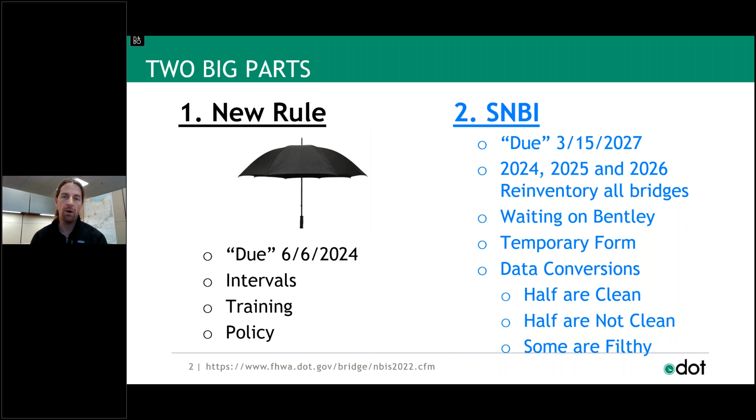So keep in mind there are two parts, the new rule and the new manual from Federal Highway. The outline of my talk is this: I'm going to talk about the qualifications, talk about the intervals, and this is all new in the SNBI and new in the rule. Then we'll get into the SNBI. The biggest part I'm going to talk about is the data conversion, that third bullet.

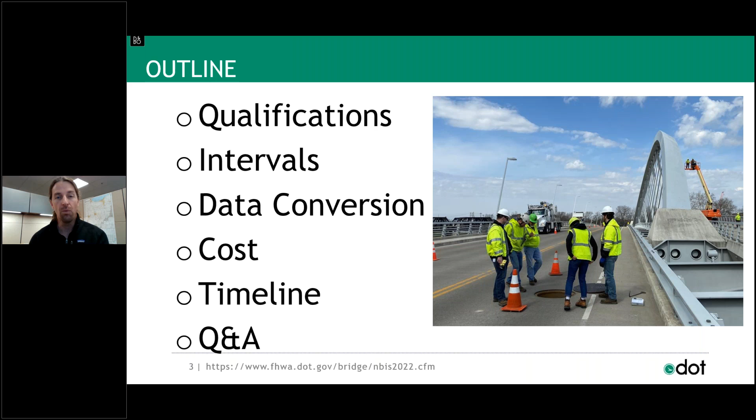I'm going to throw out some numbers, it's kind of a guess to be honest, but I'll give you some numbers, something to work with, an overview timeline, and then I have about 20 questions because we've been doing this kind of sharing the past few months. I'll share some questions people have already asked, and give you the answer. This whole presentation, as Paula said, is available for download in the handout section. Also available in the handout section is the SNBI, so if you want to start reading through that, the document is available in the handouts.

First bullet here is qualifications. It's largely staying the same. To be an NBIS program manager, you have to have an Ohio PE, you have to have the comprehensive class, and you have to have periodic refresher training. That really didn't change, but some of the finer points, Federal Highway's really gotten into.

And for the comprehensive class, there's no more grandfather clause. The last time the NBIS changed in 2005, we grandfathered a lot of you old timers who were doing program manager duties before 2005. There's no grandfather clause now. So those of you still hanging around who still need to be program manager after June 6, 2024, and were relying on that legacy or grandfather clause, you have to take a comprehensive class.

You have to take a Level 1 and Level 2, which we are still teaching, offered three times a year. Or, if you're a PE, you can take the one-week NHI bridge inspection comprehensive class for PEs. Refresher training, there's a lot of questions about refresher training, and I'll get into that later.

Team leaders, if you're a team leader, is someone that's doing the inspection, that leads the inspection either by themselves or in a team. There's 4 ways to be a team leader. I'll show you that in a bit. But notice that you still have to do a comprehensive class and still have to have periodic refresher training.

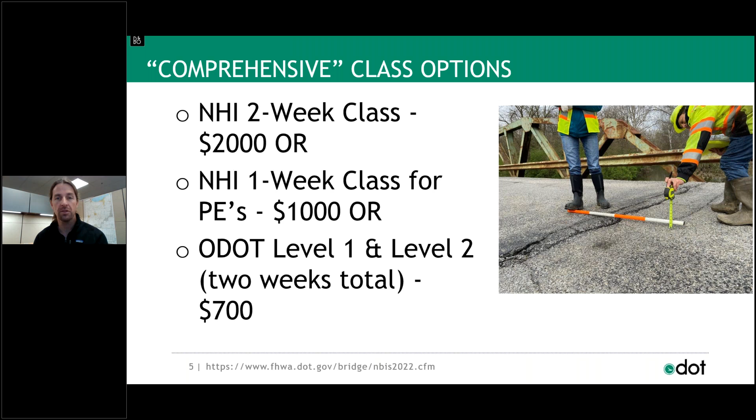NHI, National Highway Institute, you can take the class anywhere in the country that it's offered. We are trying to offer as many of those classes as we can. LTAP's been great to work with, drawing in a lot of those classes.

If we look at the numbers, this is from August, so some of you have taken classes now, but consultants, there's about 20 of you. These are like the old timers that got grandfathered in. You need to come back and take a class. It might be beneath you, it might not. You might learn something, but we're not saying you're not competent. We're saying you just don't have this checkbox to meet the national standards.

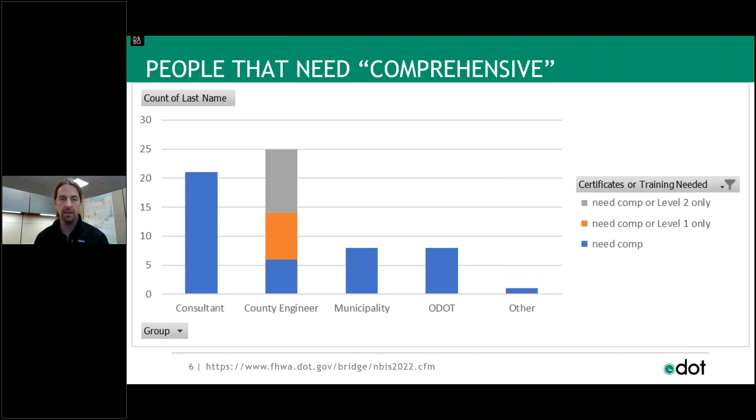So consultants, that first bar on the left, there's about 20 of you. County engineers, there's about 25 of you. Municipalities, there's 7 or 8. ODOT, there's 7 or 8, and then there's some others. There's not a huge number of people that need to take the class, but it does exist. And you've got a grace period now, about 1.5 years to comply.

The NSTM, the fracture critical class, the non-redundant steel tension member training, that's a $900, 3.5-day class. Jared Bax in our office is working on teaching this class, so we're kind of working through some of the details there. We don't have all the details, nor do we have the materials yet.

But we're considering offering this class from our office. The refresher training before, in the NBIS, it just said you got to take periodic refresher training, and states decide what that periodic refresher training is. In Ohio, we said you got to take one class once every 5 years, and here's the classes that count. That authority has been taken away from us, so to speak. Federal Highway now says they have to approve the class, so they provide the list of classes or trainings that comply.

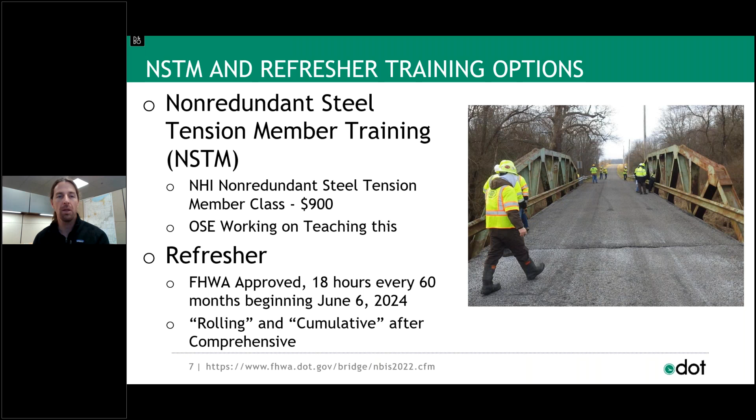And it has to be a cumulative 18 hours every 60 months. You have to have that refresher training ready to go June 6, 2024. So it's 18 hours every 60 months, Federal Highway approved. If you keep asking me, is this class approved, is this class approved, I don't know. Federal Highway is holding the keys and they are not answering. I don't know what their plan is or what classes comply. So ask Federal Highway, because that is something they want the authority to decide.

If we look at some of our classes that are currently scheduled, we have a lot of the 1 week NHI for PE classes coming up. Next week, we have one in Columbus. We have another one in Columbus in January, another one in Columbus in February. In Lebanon, District 8, we have one in March. In Akron, District 4, we have one in April.

So we have a lot of the NHI 1 week for PEs. Please fill these classes up. The ODOT Level 1, Level 2, we're going to commit to - we've got a Level 2 next week, and we're going to commit to 2 of these every year. You have to register through LTAP, and Jared is leading the charge on those.

NHI Fracture Critical - again, there's none scheduled because they're retooling the class. We hope to offer those as many as possible next year and in 2024, and we are again looking into teaching these. The refresher training, which most of you have questions about, that is an unsolved mystery. I'm going to submit that for the Netflix unsolved mysteries. I don't know anything about refreshers, so it's to be determined by Federal Highway.

Federal Highway does have a resources page and a frequently asked questions section, but they haven't put any questions in there yet. So that was the training. Many of you have some classes to take before June 6, 2024. Now let's transition into the intervals - when I say intervals, I mean how often do you inspect the bridge.

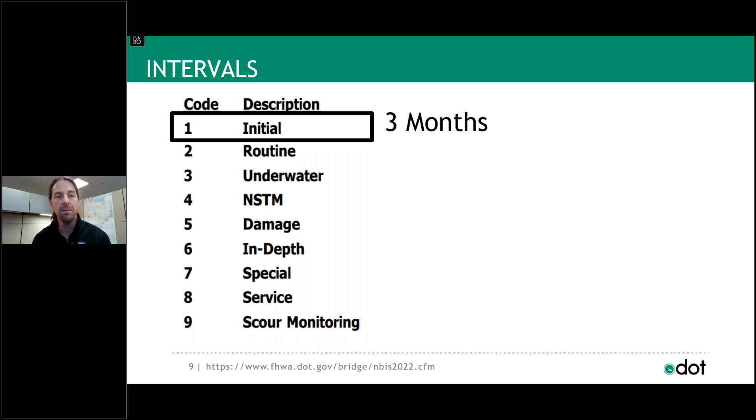Most of what we do is a routine inspection. The initial inspection - this is all new in the regulations - you have to have that initial inspection locked down and done within 3 months of the bridge being built or 3 months of the bridge being rehabbed. That includes part width construction. Anytime you put public live traffic on a new structure - new deck, new super, new sub - you've got to have a team leader inspect the bridge and make sure it's safe. Ideally, the day before it's open would be ideal, but we're given a 3-month grace period. So that is in the law now.

Routine, we're not going to change or deviate from our RBI - it's still going to be 12 or 24 months. If you want more information on RBI, we have that policy that came out last year, and that is something we're living in right now. Underwater, it's been 60 months forever and a day since the underwater requirement came about. There are dive bridges that now will require a 24-month dive. So that is a big update.

And the NSTM, which are the fracture critical bridges - there are fracture critical bridges now that must be, by national regulation, receive a fracture critical inspection every 12 months. You might guess what's going to be the requirement for reducing the dive and reducing the fracture critical interval - it's condition, and I'll show you what that looks like.

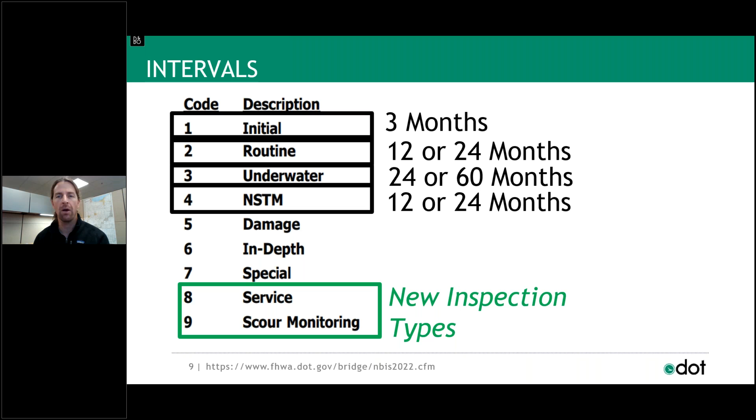We have a couple of new inspection types. The service inspection, which would be you're stopping at the railroad bridge overhead and doing a service inspection - it's kind of a less-than-routine inspection of somebody else's bridge when they're fully responsible. And scour monitoring is a new inspection type - we're kind of working out the details on the scour monitoring one. All of this starts June 6, 2024. Now I have the same question.

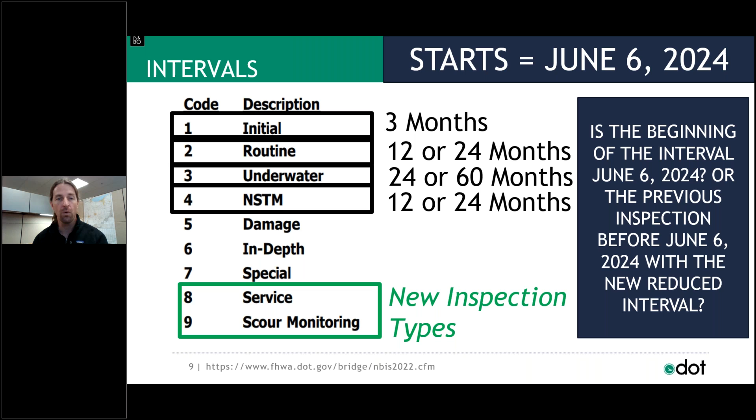Is the beginning of the interval June 6, 2024, or the previous inspection before June 6, 2024 with a new reduced interval? I haven't got that answer. I would assume we're in our grace period now, so start inspecting these bridges in 2023, 2024 to get onto that interval if it's reduced to 24 or reduced to 12 for your dive and fracture critical.

We're not going to do an extension of our fracture criticals, but if you have a super sub and it's a fracture critical bridge, super sub that is 4 or less on the 9 scale condition-wise, then you have to do a 12-month inspection. So every 12 months you're climbing the members, getting a snooper, getting a bucket truck, getting into that advanced access, getting hands on.

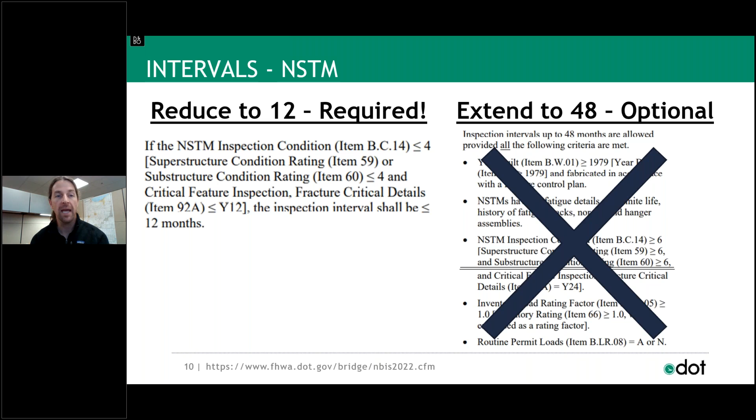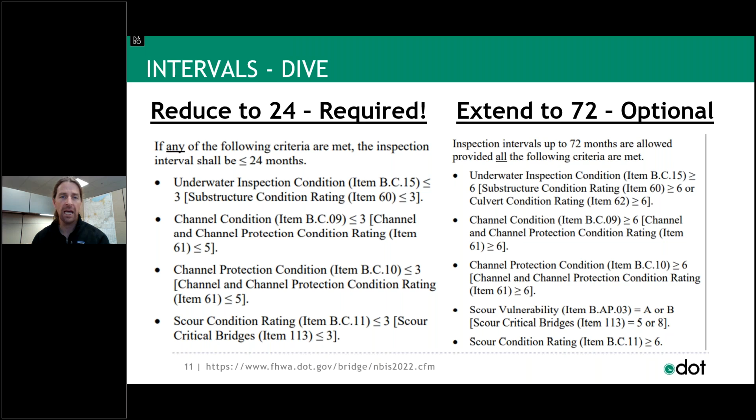That is a requirement. For dive, there's a reduced to 24 and it's based off condition. Sub, channel protection or scour condition 3 or less is a reduced to 24. And there's an extended interval, so you can go beyond 60 months if your conditions are 6 and above and your scour vulnerability code says the structure is stable.

So if we look at the number of bridges on the local agency, we have counties with 94 dive bridges, 78 of them can be extended based off of your current data. Cities have 17 dive bridges, 10 of them can be extended. So there's some good savings here in extending should you want, or you can just stay to 60 and do your 24s.

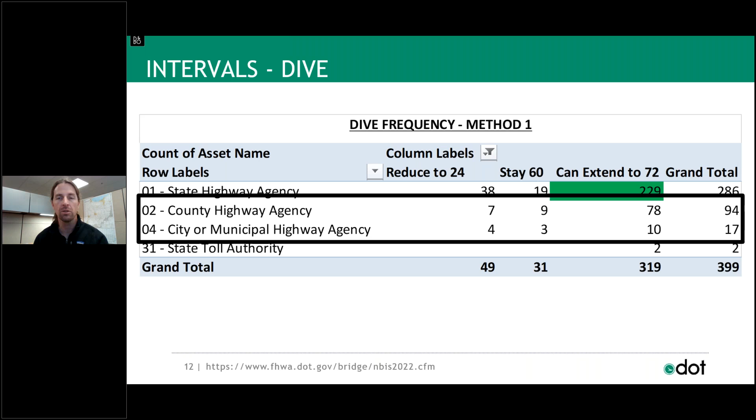Looking at the other intervals for the initial routine, this is any new, replaced, rehabbed, or temporary shoring, you've got to get in there within 3 months. And for your initial, if it's a fracture critical bridge or a dive bridge, you have to do that first fracture critical or that first dive within 12 months after opening to traffic.

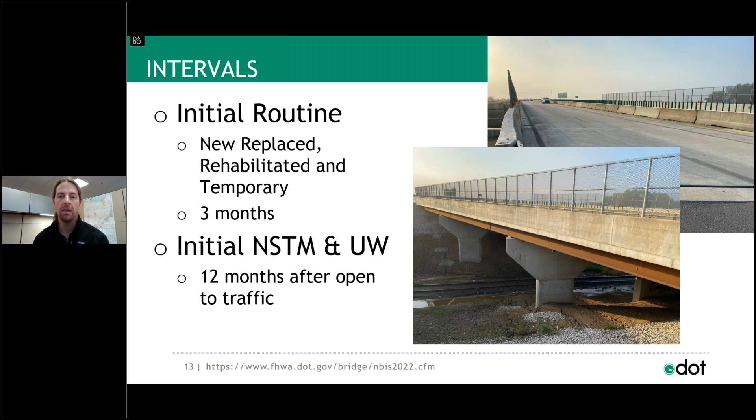So the initial routine is within 3 months. The initial fracture critical and dive is within 12 months. That was added to allow for those of you that need to contract out more complex inspections. There's a little bit of a grace there, but that is in the regulation and that starts June 6, 2024. So this is kind of like the last slide when I'm talking about the regulation.

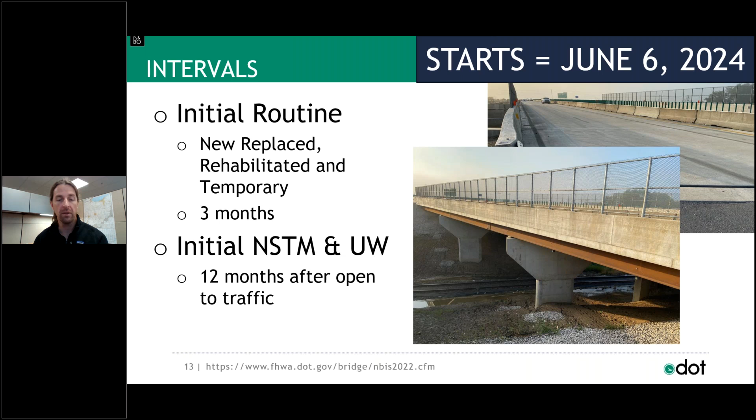The rest of my slides, the bulk of the talk here, is going to be the data conversion, the new SNBI. So we're going from the left-hand side, the recording and coding guide that came out in 1995. Believe it or not, when we submit the federal tape, we still have to convert all of our values to metric units because that was the window in 1995.

Think about all the database structures that were available to us in 1995. We far surpassed a lot of the antiquated ways in submitting. So moving off of the 1995 version makes a lot of sense to me. There are some challenges, but nonetheless, we're going from recording coding guide to the SNBI, which is on the right-hand side.

We're also going to add in the elements, the specifications for the National Bridge Inventory elements into the SNBI. Those were added to the SNBI. Those are not required for local agency structures off the NHS. So those were not added in as a requirement. They're just added into the SNBI so they don't have to carry multiple manuals. Those are in the SNBI.

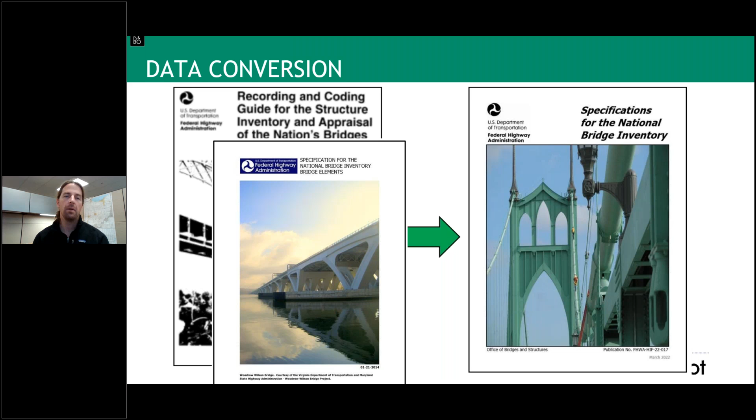We got the question, what about SNBI training? Well, this might be the first time you're hearing about this, or the second time. Since August till now, I've been on a speaking tour, meetings, webinars, and Teams meetings and the like. This is one of the stops in the speaking tour. There are lots of resources on the Federal Highway website that you're welcome to browse. Also, I have the 2 resources in the handouts to this meeting.

In December, we're going to start focused monthly webinars, December 13th, and you'll see this invite come through LTAP. There's a webinar much like this one where myself and Omar in our office will talk about how we're going to handle one of the dirty transitions, the rail standards fields. That's a nasty one. So we'll talk about how to do that.

January 25th is a webinar on component condition ratings. What are some of the changes we're seeing with those? And Valentine's Day, you can come celebrate Valentine's Day with a webinar on scour vulnerability. You can listen to my voice and hear us talk about how we're going to handle complying with that code.

We've been promised a comprehensive SNBI training from Federal Highway, and I'm pretty sure they're going to schedule this any week now. They promised early 2023 a comprehensive SNBI training. We have not opted for a comprehensive training because it's such an unwieldy, 2-3 day training.

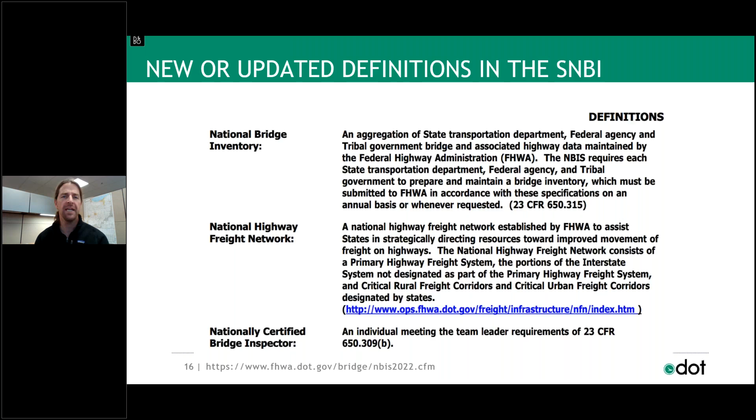If we look a little further, the data looks a little different. Those of you working for the state, we have complex interchanges where we have bridges on bridges on bridges, and multiple features. There's something in the SNBI that's a little sneaky - like filling out the element table or the under records, there's many to one. There's many under records to one bridge. This many-to-one idea filters throughout the whole SNBI.

So we have all of these features, and all of a sudden you have seven different layers where every feature needs to be inventoried. Every feature needs an ADT, every feature needs a clearance, every feature needs something - so every feature is inventoried. It might look like, oh, there's only 60 additional fields, but you've got to multiply that. If a structure has multiple features, you multiply that by the number of features. So it's not a one-to-one.

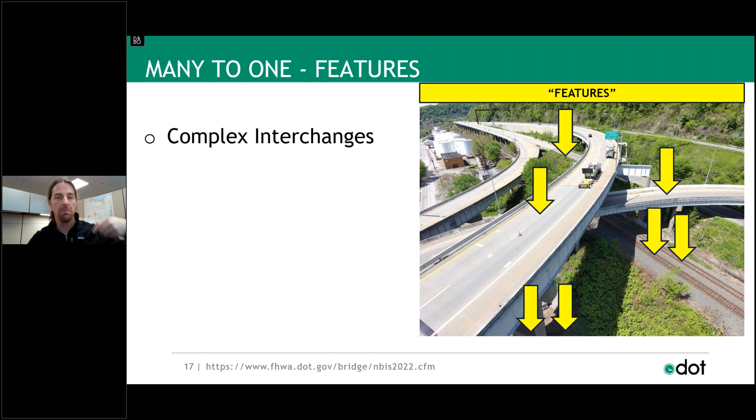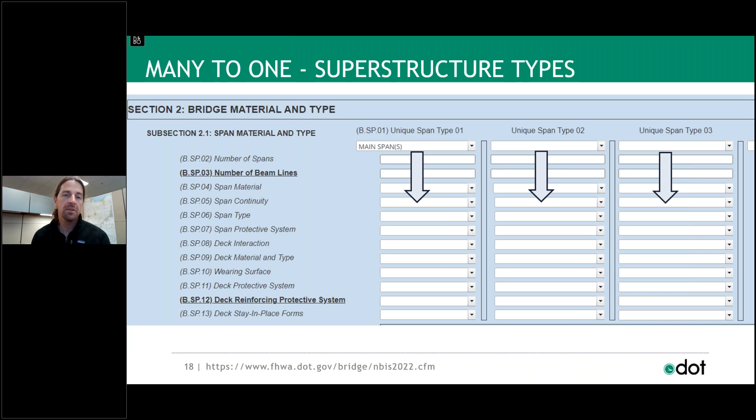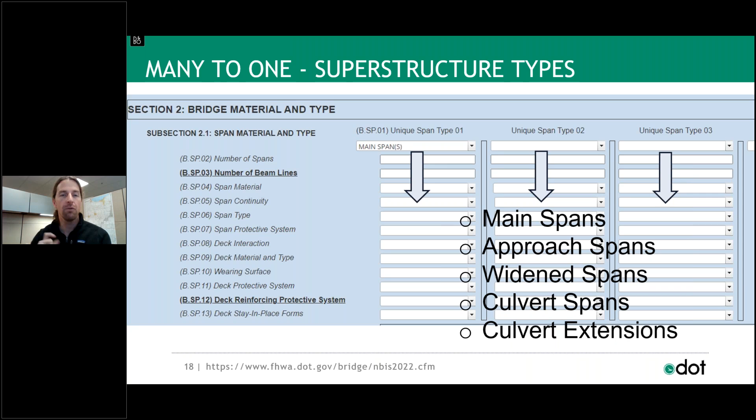If we look at superstructure types, and you have 3 unique superstructure types, each of those unique superstructure types needs to be inventoried. That could be your main span being different from your approach span, or your main span for the interstate has been widened, or you have culvert spans that have been extended - those are all unique superstructure or culvert extensions that need to be inventoried uniquely. So each unique span type gets inventoried.

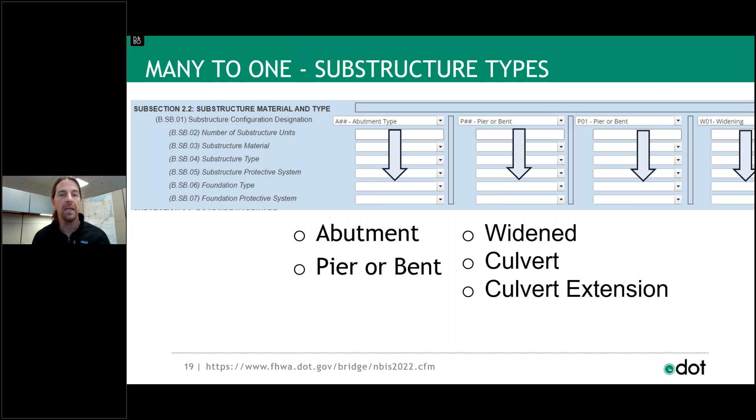Same thing with substructure types - each unique substructure type gets inventoried. So abutments will get inventoried, and then each change in pier type gets inventoried, the widened portions get inventoried, and so on. So this many-to-one really filters through. All that to say, we can't copy and paste data from AssetWise for many-to-one issues. That is something to be aware of.

If we zoom out and look at the data transitions, each bar here represents a number of data fields. On the left-hand side, there's 54 fields that are a clean transition from NBI to SNBI. The next bar, just by luck, we have an exact Ohio field - 17 Ohio fields that are a clean transition to the SNBI. There's clean transition calculated fields, you don't have any work to do there. There's new fields - about 12 that are brand new that you have to fill in. And the highest bar, on the far right, there's 65 that are not clean.

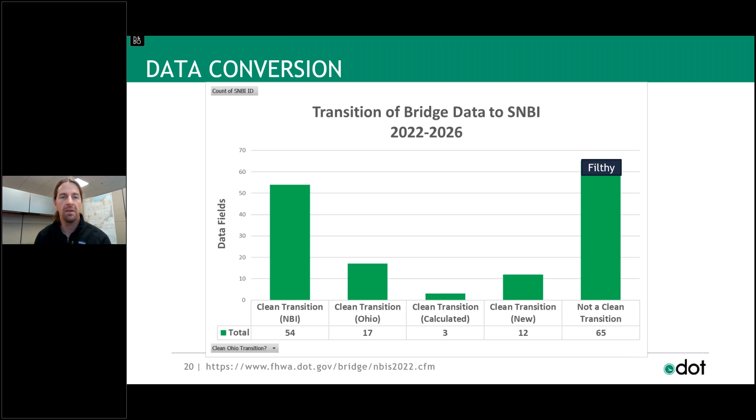You might double or triple that depending on how many features you have or how many trucks you have load rated - so there's an expansion there. If we look at just a small portion of that, there are some filthy, dirty, unclean fields that need a lot of effort. That's what we're saving those webinars for, starting in December - the filthy fields, the ones that might take a little extra understanding, a tweaking of our policy, something clearly mapped out for you. So this is kind of the transition, looking at the data from a zoomed out view - how hard is this going to be?

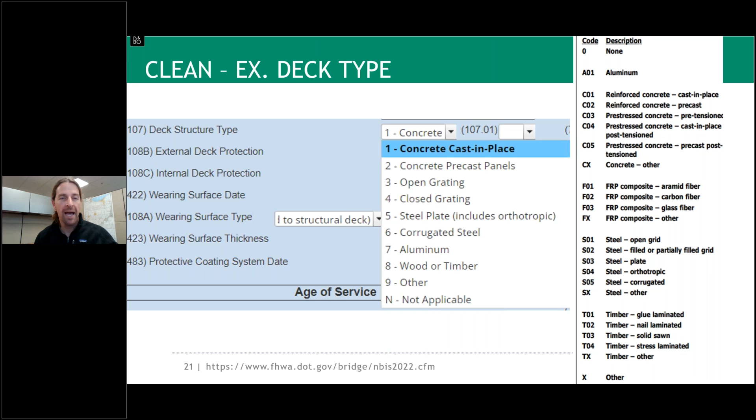If we look at some of the clean ones, the deck type concrete cast in place will go to concrete cast in place, so that's an easy copy paste. If you have a corrugated steel deck, you'll go corrugated steel. If you have a wood or timber deck, you now have to determine is it glue laminated, nail laminated, solid sawn, stress laminated, or others.

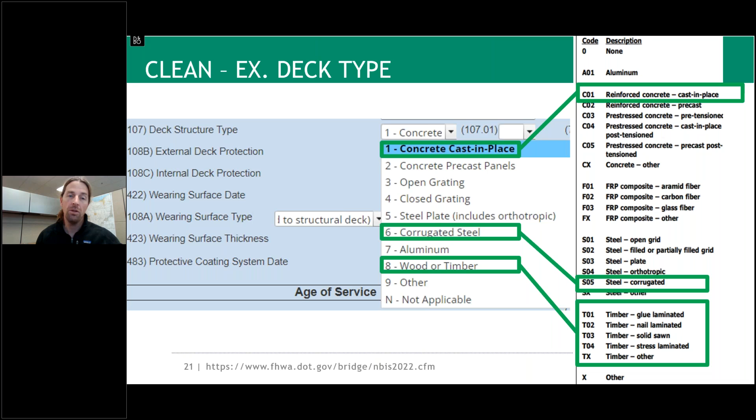So depending on your current deck type, you might have to make a decision: what type of timber deck is this? And for the others, Federal Highway has expanded the others category. Is it FRP, composite, what type of fiber? So it's kind of clean because most of our structures are concrete or corrugated steel, but the timber is not so easy.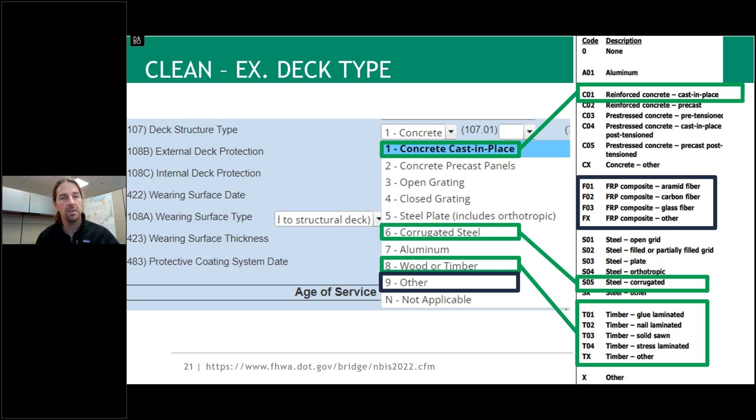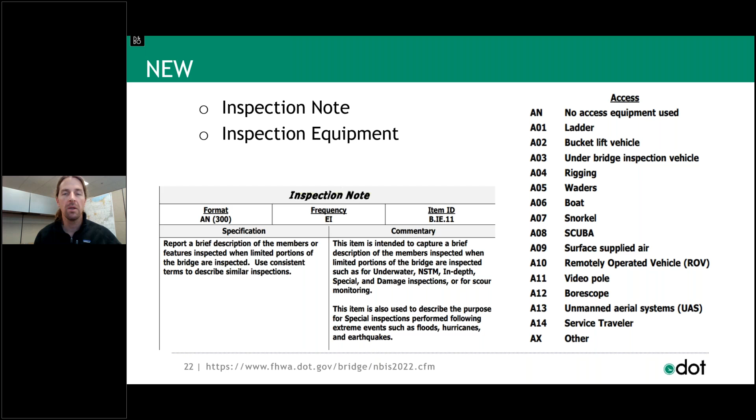So just keep that in mind. There's a new field. Federal Highway now wants some inspection notes in there, and there's guidance in the SNBI on what goes in the notes. They want to know what type of inspection equipment is used at that bridge. Was a snooper used? Was rigging used? Was a boat used? Was a drone used? There's some new ones, some not clean ones.

This is going to affect a lot of state structures. Most bridges on the local side are rectangles, or rectangles kind of skewed, and it's a simple width times length for the deck area. Well, if you have a ramp coming in or a gore area, you have an irregular deck area. Since the beginning of inventorying bridges, this deck area has been width times length.

And that's been good enough until now, but Federal Highway now wants to know what the actual deck area is if it's an irregular deck. So you're going to have to do some geometry, some trigonometry maybe, and get that actual deck area and put it in that new field, irregular deck area. So that's coming online.

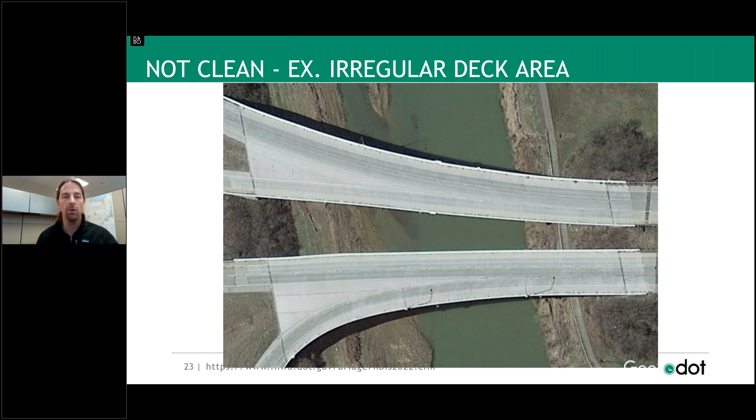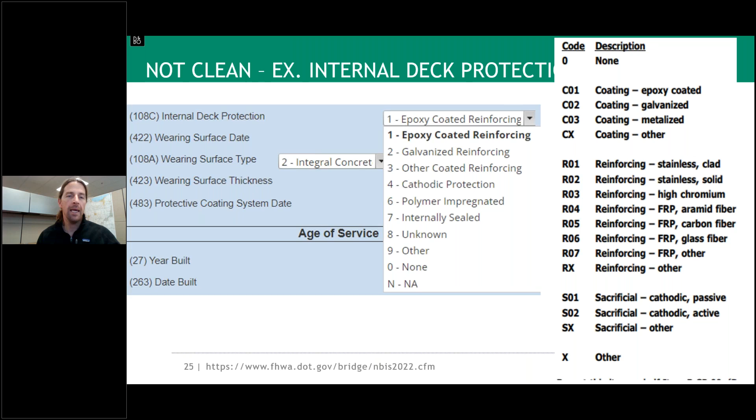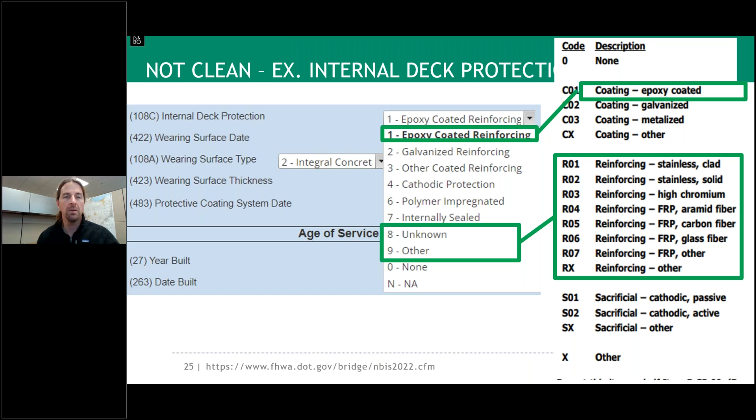Wearing surface type is really not clean. Some of them are copy paste, others are a little dirty. And what type of internal deck protection - that's a current field we have, but there's more options within the SNBI. The epoxy coated is going to go to epoxy coated, and unknown or other are really spread out to stainless, FRP, high chromium, those kinds of options. So these are some of the not clean options.

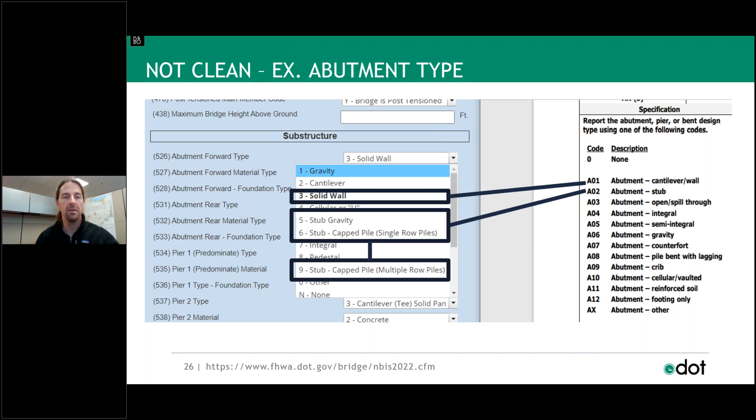If we look at abutment type, asset-wise on the left, SNBI on the right - sorry, I didn't say that at the beginning there. Solid wall will go to solid wall, but we have a 5 and a 6, a stub gravity and stub cap pile. Those will then go to stub, and stub cap pile multiple rows. Those will all filter into stub because we are going to be inventorying foundation type separately. So there's parsing, and the jigsaw puzzle needs separated just certain ways.

Material type, we're going to be coding material type. So for example, if you have a steel beam superstructure, calling it steel beam superstructure is no longer acceptable. Whenever we roll this out, you've got to define the type of steel. Is it a rolled shape, a welded shape, a bolted shape, riveted shape, or both bolted and riveted? So it's just slightly off enough.

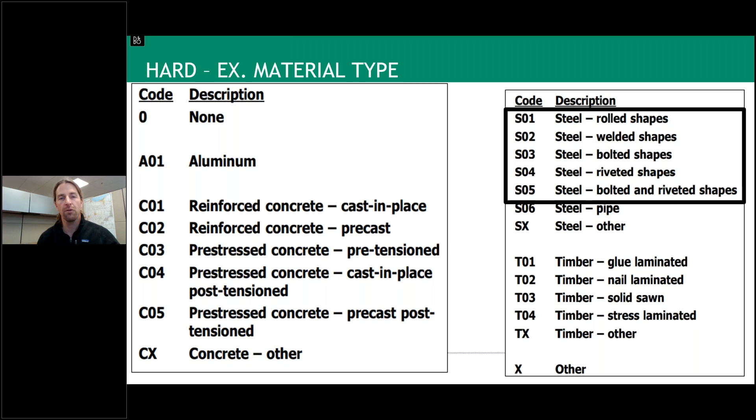You basically have to re-inventory the whole bridge. We can't copy from steel to steel anymore because we don't know if it's rolled, we don't know what type of steel it is. So there's going to be a lot of effort to re-inventory the bridge here. The benefit is you're going to get to re-inventory the bridge - you might find a lot of the inventory was incorrect and it needs to be updated, and now is the perfect opportunity to update. Bents or piers is the same.

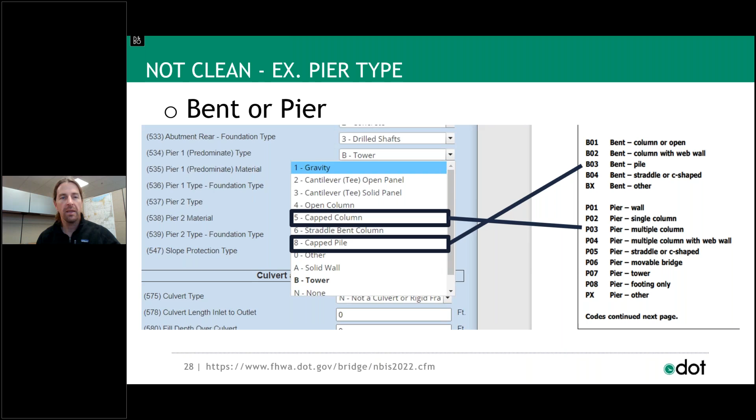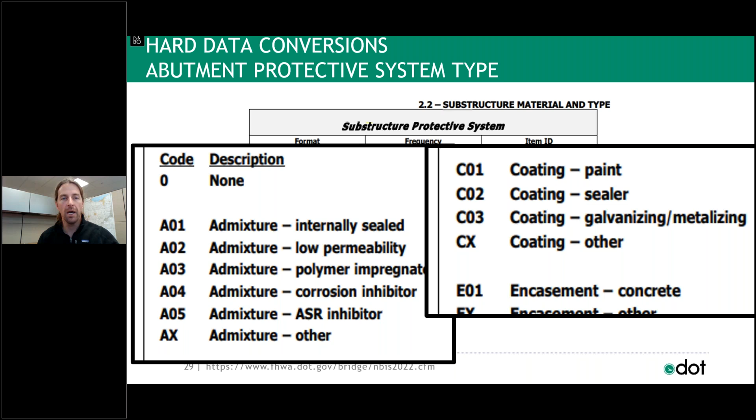This is not a clean transition. Cap pile columns are the same, but there's a lot of extras. There's going to be some hard data conversions, like what type of protection is within the substructure - none, or is there an admixture, is there some sort of passive protection? Foundation types is going to be an especially hard one, so you're going to have to pull plans.

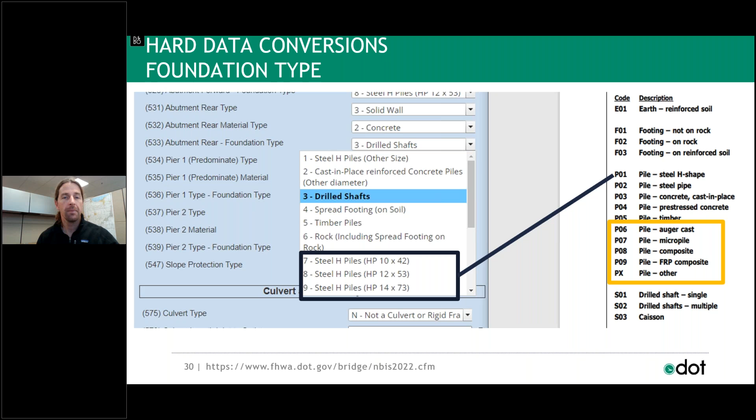What type of piles are going to be required, more of the not clean details, whether or not the bridge has fatigue prone details, E or E prime. That's a yes or no.

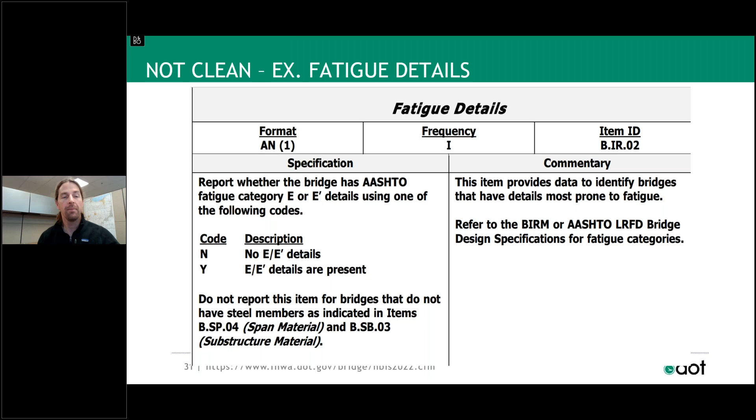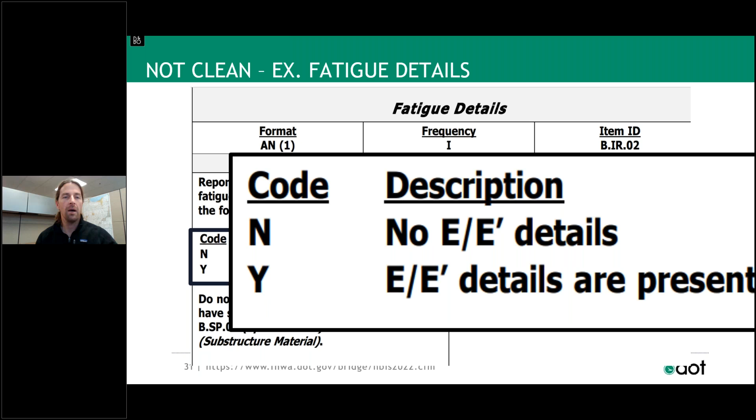An inspector that is inspecting bridges that are fracture critical should know what an E or E prime detail is. If you don't know, we encourage you to take that fracture critical class. At the end of that class, you'll know. If you still don't, ask your bridge engineer or hop in the inspection manual. There's some guidance in there.

Something we're doing because of the SNBI and other reasons is adding fields into AssetWise next to roadway fields. We've added about 20 fields. Those of you in the inspection inventory world have probably seen these.

We're going to go live with this roadway inventory updater for all local bridges in March, the second half. What RIU is, because part of the federal rule, is that we have to marry roadway data and bridge data. They have to match and say the same thing when we make both our road and bridge federal submissions.

Right now they're not perfectly matched. So we are pulling in roadway inventory into the bridge inventory so you can see the differences and correct them. We started that with a soft launch for state bridges a couple months ago, and we're going to go live with all bridges in March.

For those of you where the roadway inventory doesn't match, where the roadway route number doesn't match what's in TIMS, this is going to be a big, heavy impact. For most of the state, it's not going to be a big impact, you won't notice it. You might notice it on the approval side, the PE approval, but that's coming in March.

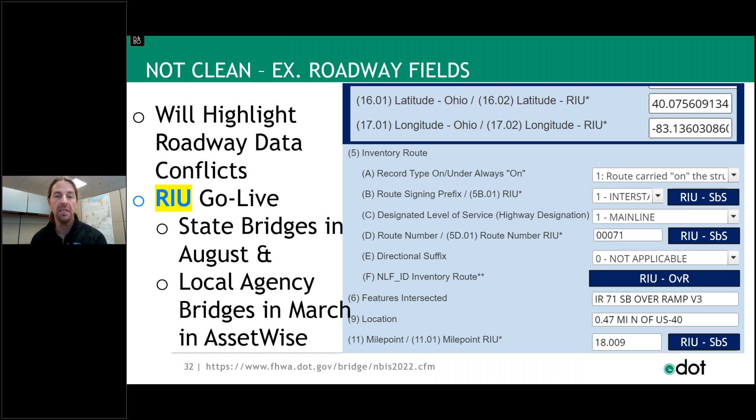If you have latitude and longitude correct and a few other fields correct, five fields total, it'll populate 20 extra fields. So it's a good deal. If you want more information on RIU, every single bridge in AssetWise has a link called Roadway Inventory Updater, Data Improvement Form. You can click on that form and read about RIU and what to expect.

Some more of the heavy lifts in the SNBI are bridge railings, bridge railing transitions, our legal load configurations and legal load rating factors, scour vulnerability, and work performed. These are all heavy lifts.

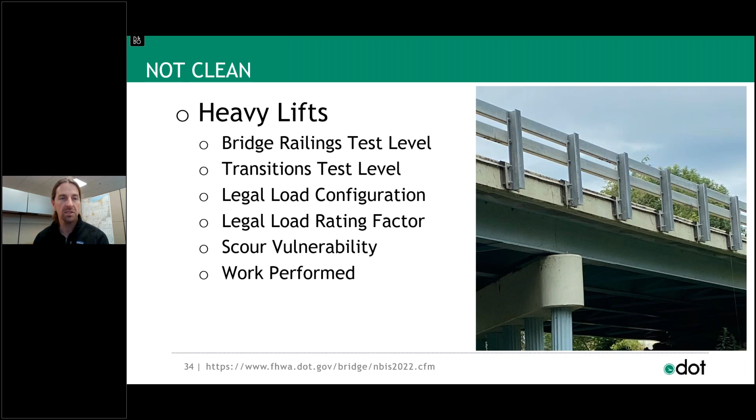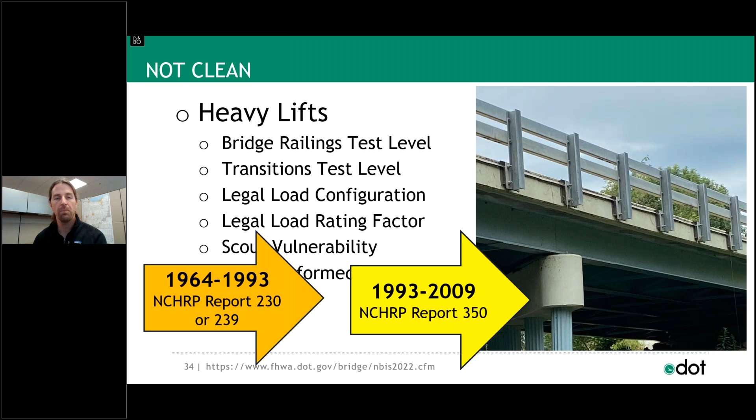If we just look at railings, there were three separate eras in which we performed test levels where we physically ran trucks and vehicles into bridge rails to see how the vehicle and the bridge rail would respond. We started in '64 with NCHRP 230 and 239. The next era was 93 to 2009, NCHRP report 350. And then we're in the MASH era now, 2009 to present.

So every single standard rail has been tested with these test levels since 1964. Federal Highway needs to know what test level and era the railings were crash tested against. You might think, what you just told me is all brand new, how am I supposed to code the bridge to know that? Well, Omar's creating something simple so you can inventory the rail correctly, and it will tell you what the code should be.

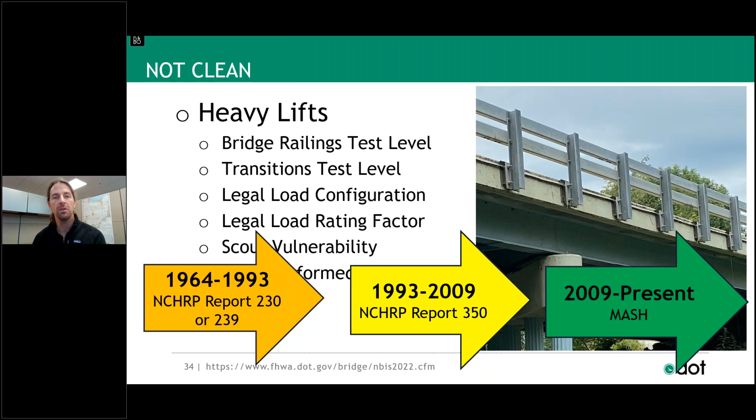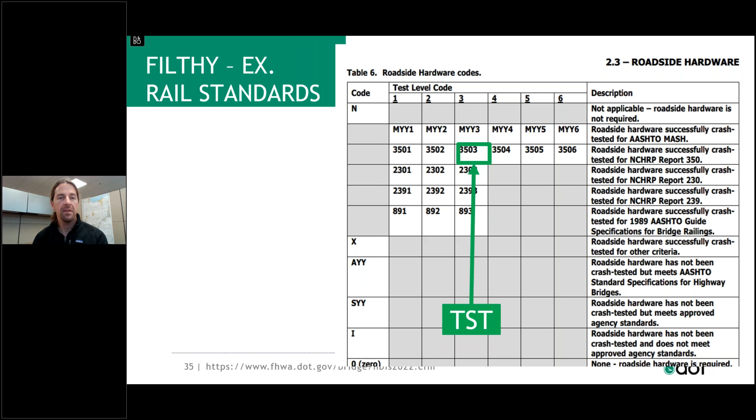If we look at the SNBI, this is the confusing table with test levels on the top row and descriptions on the rows. The TST rail should be coded 3503. The DBR rail is 3502. The New Jersey 32-inch is 3503, not to be confused with the GM barrier, also 32 inches high but a little squattier, that's an I. New Jersey 42-inch high is 3505. New Jersey 36-inch is M093. And the single slope 42 is M095.

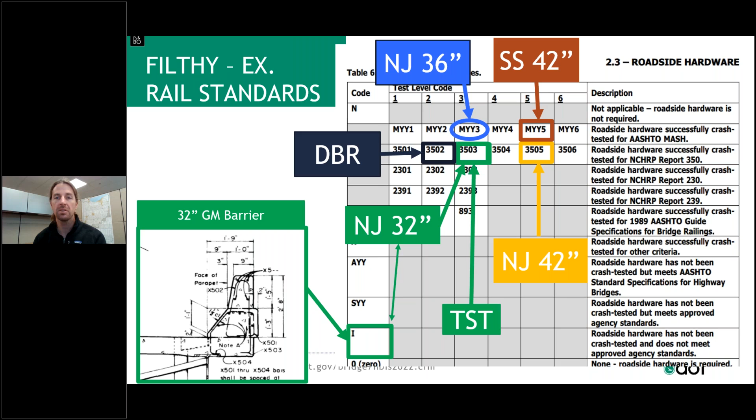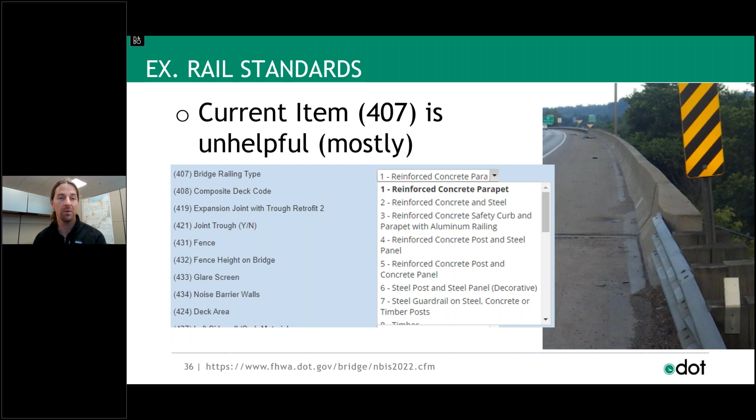This is too heavy a lift for inspectors, to be honest. So we're trying to make it simple where you just inventory the rail type. Sadly, item 407, the current bridge railing type, is unhelpful and kind of wrong based on the checks we've been doing. So we're going to scrap that and re-inventory our railings, and by doing so we'll actually populate that field for you. That's going to be the whole webinar on December 13th.

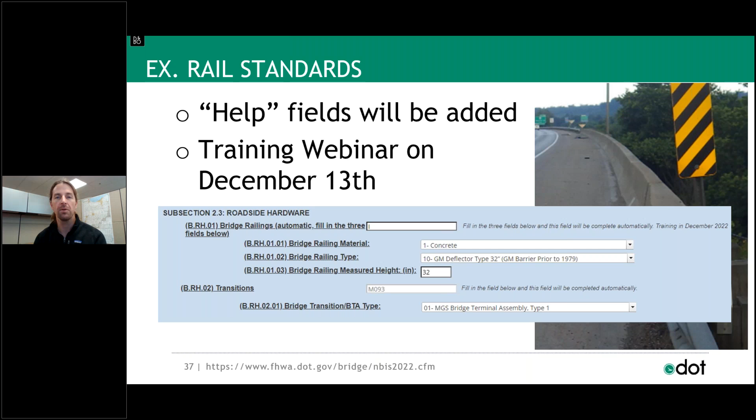There's going to be about 6 new component ratings, and when you think component, you should think 9 through 0: deck, superstructure, substructure, culvert, GA. We're going to add bridge railing condition 9 through 0, bridge railing transition condition 9 through 0, bridge bearings condition 9 through 0, and channel protection condition 9 through 0. If you have a fracture critical bridge, the fracture critical members—the worst one, the controlling one—needs a 9 through 0 as well. And if you have a dive bridge, all the underwater portion needs a 9 through 0 as well.

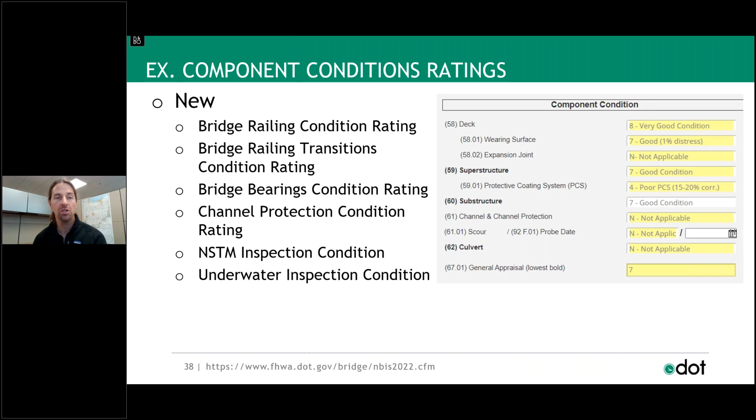So we have additional component condition ratings. You'll see those come online soon, and the guidance is different. It's just different enough that we have to retool our entire inspection manual. This is the inspection manual from the SNBI—table 20 is what we need to fit into our current guidance.

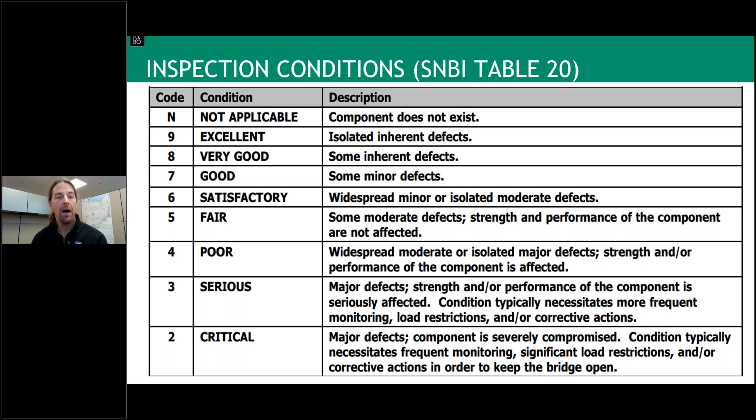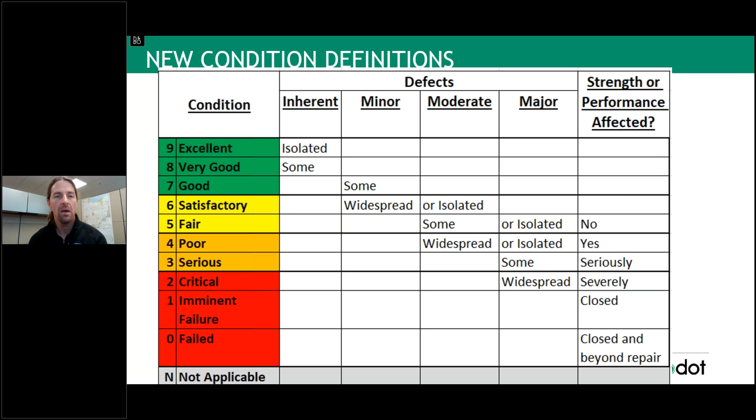If we look at table 20 spread out, we have to define what an inherent defect is, a minor defect, a moderate defect, and a major defect. That's the severity of the defects we have to define. Federal Highway has given us some guidance in the SNBI in Appendix C, but we also get to decide what is isolated, what is some, and what is widespread.

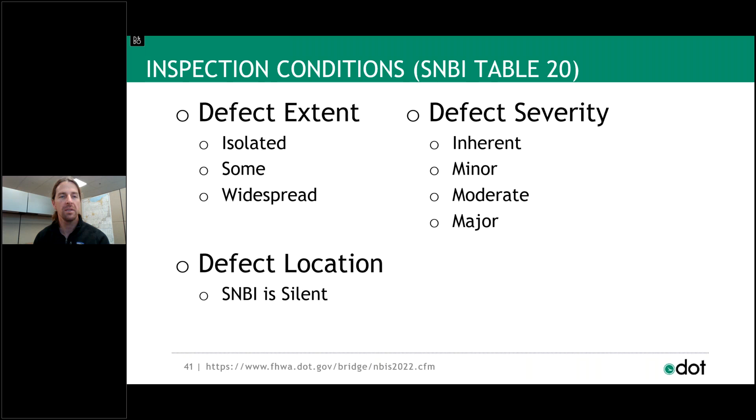So we have some decisions to make when we update and rewrite the inspection manual. Here's some of the language we have to define: defect location—the SNBI is silent on location. And we all know location and redundancy really matter when we talk about what's a 9 through 0, so we've got to figure all that stuff out.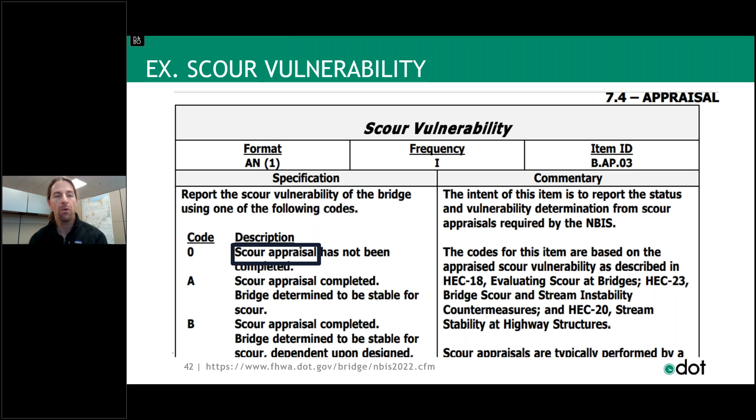Another tricky field is this scour vulnerability field. It's supposed to be similar to that item 113 scour critical susceptibility field, the field we've been filling out for decades. This one's a little different—we have a term in here called scour appraisal, meaning scour appraisal has not been completed, or scour appraisal has been completed. We have this field to fill out, and just as a PSA, I'll give you the definition here.

Scour appraisal is the controlling, most vulnerable, or most unstable answer when you look at the observed scour and estimated scour. Observed scour is what you do every time you do an inspection—you take your probing rod out, you probe, you inspect for scour, you take photos and measurements, you take your channel profile photographs or channel profile cross sections. That's observed scour. Your estimated scour—you have to have both observed and estimated.

Estimated scour is either a scour evaluation done for ODOT structures, done at early design stage, because we've got to know what type of foundation and how deep the foundations need to go. So scour evaluations are done early design in a hydraulic report—those are calculations—or a scour assessment. The scour assessment is a checklist where you take a step back and look at the history of the scour, the history of the bridge, the hydrology, and the channel changing. There is a checklist in the inspection manual from 2014.

We're actually adding portions of that checklist into AssetWise to make it easier for you to fill out a scour assessment, and we're adding a screening process—a phased screening process for scour assessments—into AssetWise. Documentation is important. For scour evaluation, you need the check flood, the design flood, the hydraulic study—so you're doing the blue scour evaluation or the red scour assessment. Documentation for scour assessment is the checklist from the manual or item 113 training.

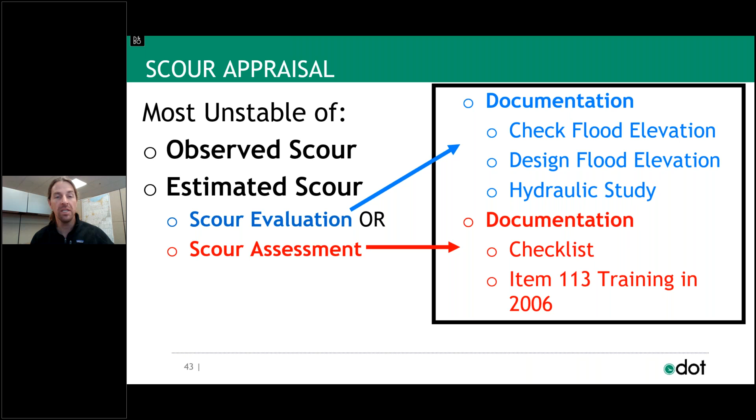But anyway, SNBI is overwhelming. Once you do a couple bridges, you'll get the hang of it. It won't be a huge deal per bridge. Now let's look at some cost estimates.

When Federal Highway gave us their proposed rulemaking, every state in the country, and county engineers in Ohio, some cities too, responded. They said this is good or this is bad, or this is going to cost $40 per hour or $100 per hour, or take an hour per bridge or 10 hours per bridge. Some states said it would take the entire state $200,000 to implement; others up to $18 million. Time to implement: some states said 24 months, some 48 months, some 10 years.

So the nation really doesn't know the impact. We don't know. My guess for Ohio, adding local, adding state, adding the training, adding all the time and energy, we're close to $18 million.

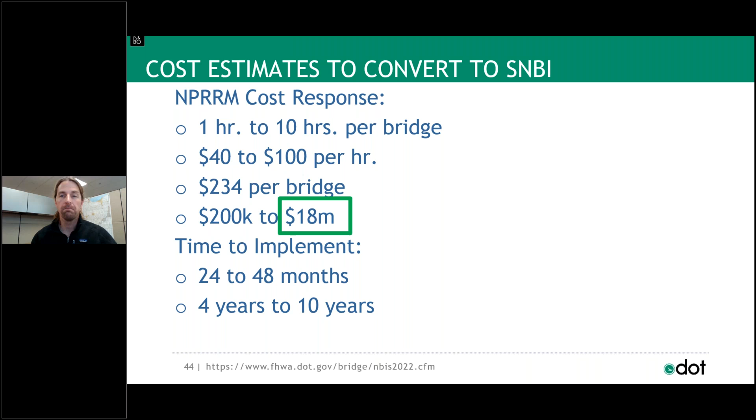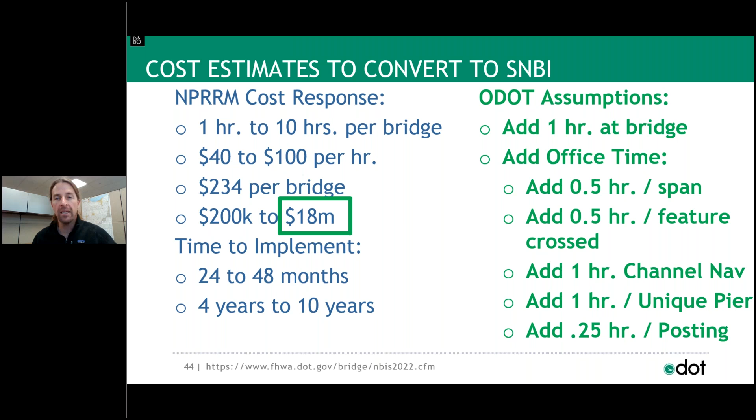If we consider adding an hour every bridge at the bridge, plus office time - half an hour per span, half an hour per feature crossed, one hour if it's a navigable channel, an hour if there are unique pier types, and a quarter hour if the bridge is posted, because there are extra ways you have to inventory your posting - you're looking at an extra 2 hours for counties, 3 hours per muni on average. So most of your bridges might be an hour and a half, some might be 10 hours depending on complexity.

So it's a big ask. On average for the state, it's 3 hours extra per bridge. If you take 3 hours times your number of bridges, that's how many extra hours you need - not every year, but one-time for that bridge in the next 4 years to transition to SNBI. All I've done on this table is take that number of bridges times average extra hours times $150 per hour to get that $18 million at the bottom.

So that's a total guess, but just so you know, it's about 3 hours per bridge. It's my goal to take all those heavy, dirty transition tasks and cut down that number of hours as much as possible, to make this as straightforward as possible for people to re-inventory their bridges.

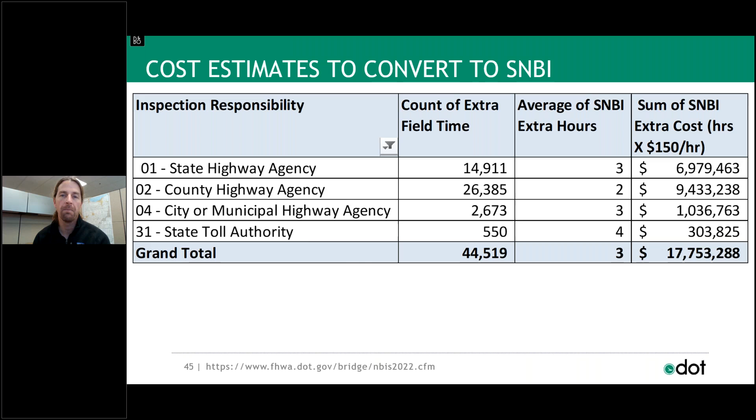We have something on the programmatic for consultant selection. On the March programmatic, we need a consultant that is good at technical writing and aware of the bridge inspection world to do the manual. I'm recruiting a very small steering committee to make policy decisions for the manual. We're not going to be writing the manual ourselves - we're going to be directing the consultant.

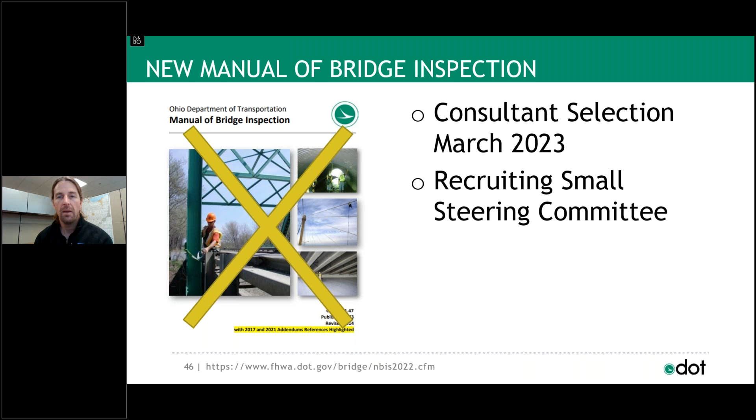This new inspection manual is going to include the inspection, the inventory, the element inventory, the SNBI stuff, and any new policy that's required. So the manual is going to be pretty big, pretty unwieldy, but it will be digital, so it won't seem unwieldy.

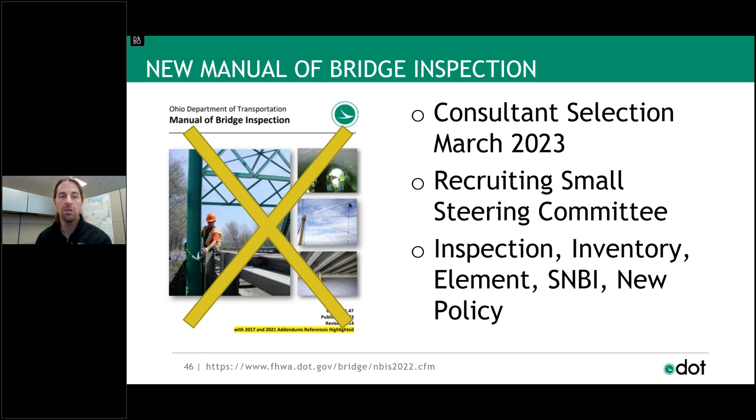2024 is the biggie. We're going to start implementing in full force. Every bridge you show up to, you're going to be converting to SNBI. In 2025 and 2026 is when you're going to be really implementing. Target is the end of 2026, so we can make that federal submission on March 15th, 2027.

So the question right now is, how do you prepare? You're in the preparation and organization mode right now. How do you prepare? Well, if you're not organized with your plans, get organized. What I mean by plans are bridge plans. Can you get to your bridge plans? Many of you are yes, so that's good, so move to the next one.

Take a bridge and try to inventory it with the SNBI. Carve out you and an inspector on your team, dedicate 2 days to one bridge with the SNBI, and practice. See how it goes.

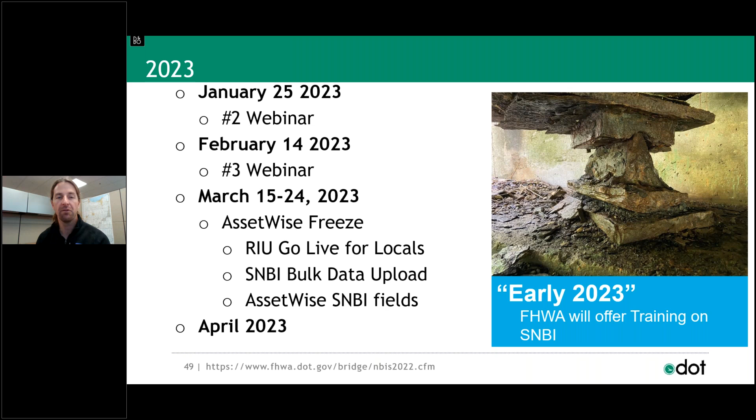We've got a webinar on the rail standards December 13th, another one on January 25th, and then Valentine's Day is the third webinar. Second half of March 2023, we're freezing AssetWise, so no new reviewers, no new inspections. We're freezing asset-wise so that we can go live with the RIU and so that we can bulk update data into the SNBI. And then hopefully we have that federal highway training in 2023.

As I said, 24, 25, 26 is the big push. June 6th is the deadline, due dates for intervals, qualifications, and manuals.

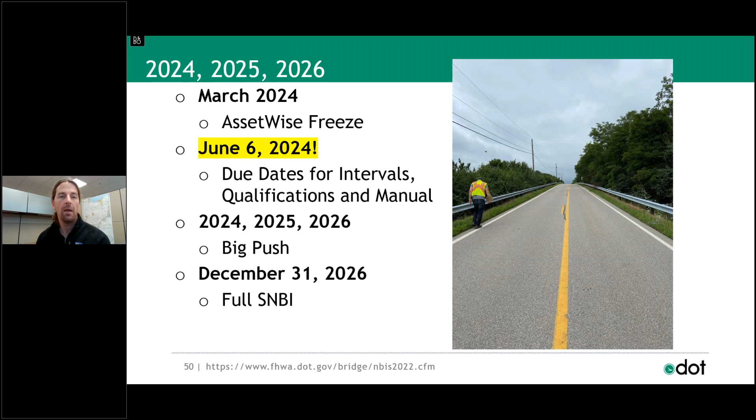I said at the beginning my disclaimer, I'll say it again here: I am not a Federal Highway employee, I am an Ohio Department of Transportation employee. I am downstream of these decisions, what's in the SNBI and what's in the federal regulation. If you have questions, there's an email address, NBIS_SNBI_questions@dot.gov. Please ask Federal Highway your questions. My contact is below that, much smaller, so email Federal Highway first.

If you'd like some more answers, or this kind of gets you excited and you want to know the gap analysis, what's the difference between the old NBI and the new SNBI, or the old regulation and the new regulation, or if you'd like to watch a Federal Highway webinar, there's a lot of resources available for you on Federal Highway's website. On the NBIS, it's fhwa.dot.gov/bridge/NBIS 2022, and you can see the SNBI right there as well. There's also a gap analysis on the recording and coding guide versus the SNBI. So there's a lot of resources there.

What I'd like to do, Paula, I have about 20 questions already asked and already answered. I can click through those pretty quickly, and then I will go through the questions that anyone asks live. All of these questions and answers are in the handout available in this webinar.

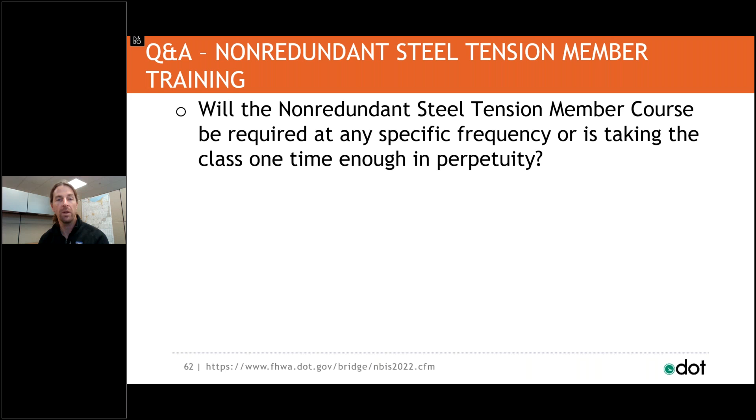You need the class. Will the non-redundant steel tension member course be required at any specific frequency, or is taking the class one time enough? It's one and done. One and done.

I'm already scheduled for the fracture critical class in November. This is actually, we just had the fracture critical class. I'm up to date on my refresher training. Will the NBIS and SNBI training be included in the upcoming annual refresher training? I would hope that fracture critical class would count as refresher training. I don't know, because Federal Highway needs to be the approver, and I would assume they would, but I'm not promising.

Refresher training, the new requirement for refresher training is that 18 hours of training will be required. What is the frequency of this training? Every year, every 5 years? 18 hours every 60 months. It's accumulative. Those of you that have PEs, similar, you have 2 years to get 30 hours. But let's wait for Federal Highway to answer those details.

In January 2021, I completed the 7-module LTAP e-learning bridge inspection refresher course. I am unsure of my refresher requirements. Will I need an additional 11 hours before June 2024?

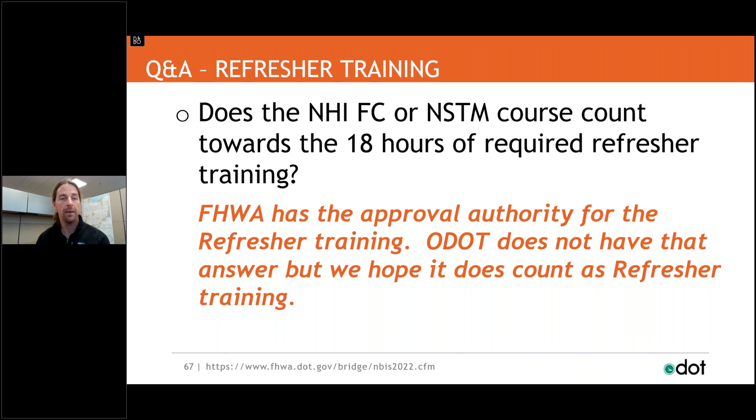More refresher training questions. Does the NHI fracture critical or NSTM course count towards refresher training? I hope so, I don't know. Federal Highway has the approval authority, and hopefully they let us know.

My current refresher training expires in '23. I took a non-redundant steel tension member class by ODOT, and I am a PE. Do I have to do the NHI class? You will need 18 hours of approved, Federal Highway approved refresher training every 60 months starting June 6, 2024. That's all I got. Up until 2024, you do need refresher training to get to June 6, 2024.

Another refresher training course question. I took the online module courses last year. How many hours of training do these count as? 6 hours. You can't take it twice and get 12. So it's a 6-hour one and done.

My current refresher will run out soon. After the cutoff date, will there be any grace period? This is the grace period. You are living in the grace period. So you got to take refresher training before June 6, 2024 if you need 18 hours every 60 months.

I took the ODOT offered online refresher course in 2021. Does this count for the new implementation? No. It will get you to June 6, 2024, but not after. You need how many hours? 18 hours every 60 months. Again, you're going to have to wait for Federal Highway to answer this, or just ask them. Ask them, they want to be the approvals. They can decide.

All right, last question. Thanks for holding on. What is RIU? RIU is a roadway inventory updater. We take roadway inventory data and paste it into AssetWise. We only paste it into AssetWise if 5 fields are saying the same thing: latitude, longitude, the route number, matching the county log within I think 65 feet. There's 5 fields it has to match.

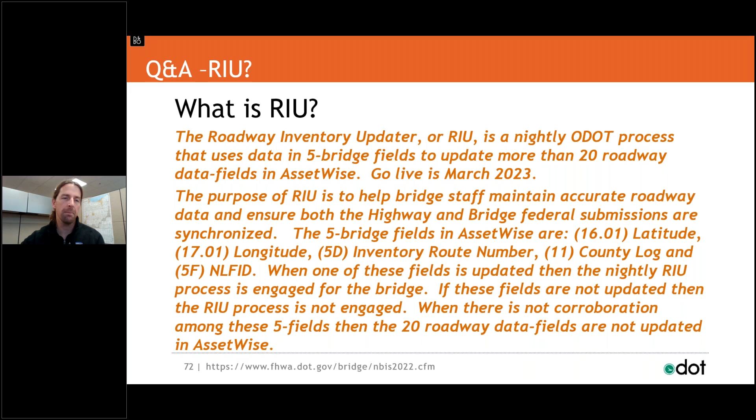Will the 6-day, this is from James, will the 6-day level 1, level 2, 2 times 3 days count as comprehensive bridge inspection training after 2024? Yes. Yes, James, you're good.

Will the old fracture critical class circa 2014 still count? Yes, that class is one and done. I took that class in 2003, and I don't need to take it again. I did, but I don't need to take it again. So that is a one and done class.

I plan to create a new role in AssetWise for those that have taken the class, and that team leader will be able to update the fracture critical condition code, fracture critical yes or no code, fracture critical date code. So there's maybe a handful of codes that that new role will be able to edit, and that's how we plan on managing through role security. Good questions, Joe.

Joe, are you documenting continuing ed? How we plan on documenting, we are currently. It is a heavy task to go through every single certificate. We will develop some sort of procedure. It's very similar to what we have now, but we need to improve it somehow, where we make sure that everybody has refresher training and everybody has the comprehensive class, and we link that to the role security.